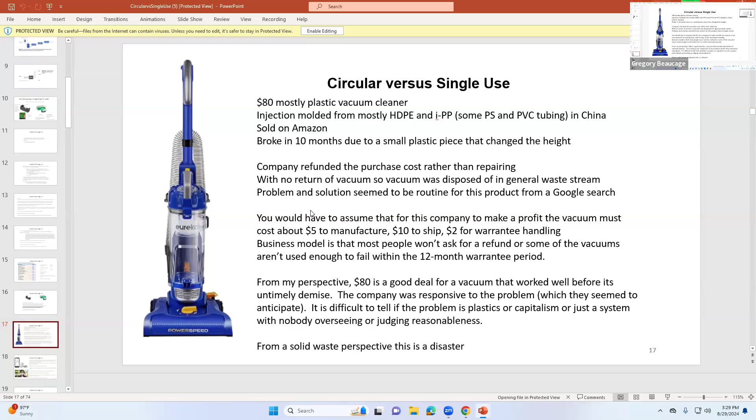So I wanted to do a tour at Rumpke Recycling on Wednesday, a week from yesterday, but only one person replied and that person said they couldn't go.

So is there some time that we could do tours? You're all chemical engineers in the same cycle more or less, right? Is there some time? Does anyone want to do tours? So when? To go down to Rumpke and look at the recycling thing.

It's outside the class. Other people that aren't in the class can go on it too. We kind of need at least 5 people to make it worthwhile. So, anyway, can you guys pick a time or can we vote on it or something?

What time? I know this is probably an unpopular opinion, but I feel like most of us have no classes on Fridays. The rest of us, like I have a lab on Wednesdays at that time, so our labs are throughout whatever, so it'd be really hard for me to take time out of my day Monday, Tuesday, Wednesday, or Thursday, because some professors aren't understanding if I have to miss class, whereas if it was on Friday, I'd just have to work around my one thing.

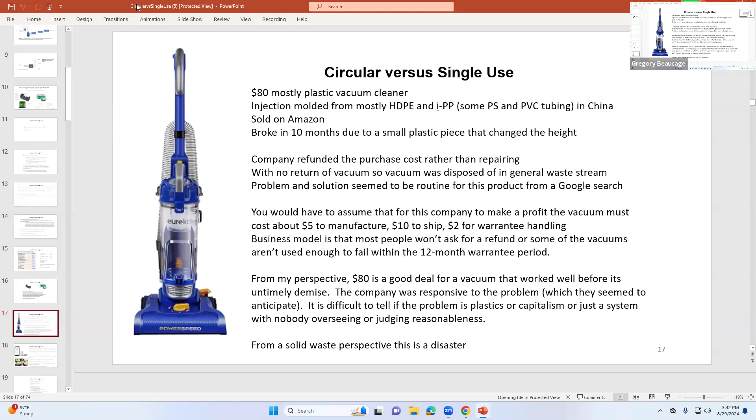I was going to go through a couple of things, but like, so you have this—this is an insulin pump, it's almost completely made of plastic. It's only got a little teeny piece of metal in there, I've taken these apart. That's it, the rest of it's all plastic. And it's disposable, a 3-day use, toss it.

So basically, this is a linear thing. It's an example of something that's a huge life improvement—it's got no cables to it, nothing. It just does that thing, and then you toss it after 3 days. That's a way improvement over any technology that was there before for the people that use it. But if you look at it, it comes in a blister pack with all this packaging that you have to throw away. And there's a whole movement in the medical field that culminated in COVID when these masks—we ran out of masks, right?

So there was a while where you couldn't get the N95 masks. People were clamoring for them and stockpiling them. I went to a doctor and they had a stack of them on the counter. I grabbed like 20 of them, because I figured these are going to run out really fast.

As it turned out, the mask became like a symbol of the left wing to right wing people. But anyway, among medical professionals, they were doing shifts and didn't have any masks. They ran out, so they were just getting exposed, right? So they're upset about it.

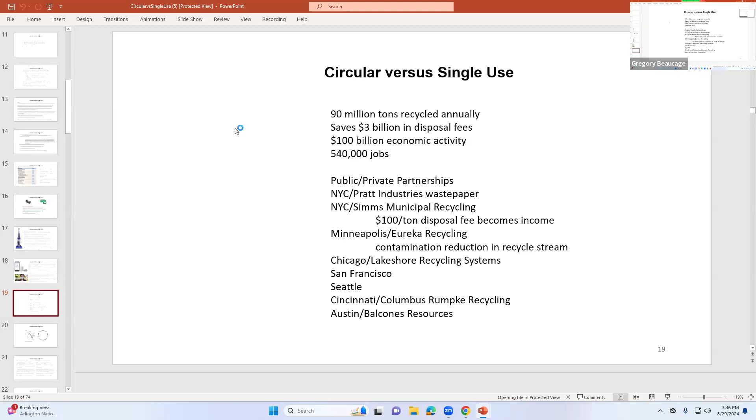Anyway, so basically the circular idea originated with this flow of things, and it's gone into industry where it's like a main theme among the plastics people. And then basically these are kind of the ideas: longevity and reuse of things, harmony with nature.

And then what does it ignore? Well, this whole thing is like, oh, we can just keep going where we're going if we can just figure out how to reuse plastic bottles and fill with shampoo at the store instead of buying the bottle of shampoo, which is something that's minor. Like people think, oh, that's going to be terrible.

Like when I was in college, at your age, we had a co-op and I did that. That's how I got all my stuff. It was cheaper, you know, so you just had a bottle and filled it. They were talking about the same kind of idea back then, so it wasn't a big deal to do that. People think, I guess, have been convinced that they need to get something and throw it away. And it's not really true. It's pretty easy to make that shift.

But the problem is there's too many people in the world, and it's not in the US because our population without immigration is going down. We aren't producing enough, so we need immigration to keep the economy right. Like if you want to have Social Security when you retire, you're going to have immigrants. Otherwise you won't have it, right?

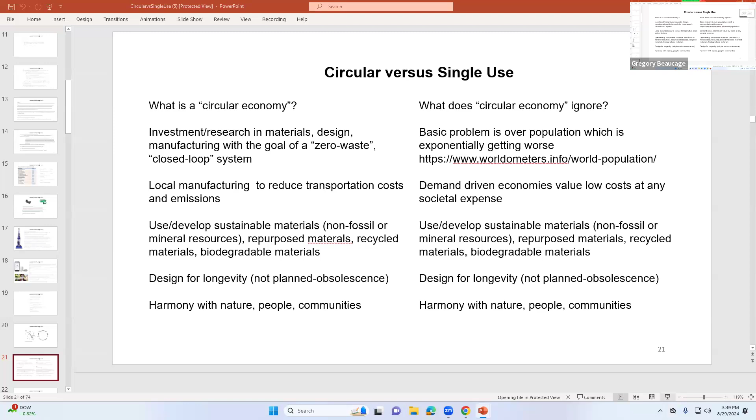I mentioned the oil wells in Colorado. So yeah, there is a corporate motivation, and you see it. Have any of you seen this circular thing at your co-op jobs, or people researching it? Like Lyondell, this is the only thing they talk about. When you go there, if we go on a tour of Lyondell, everyone there is talking about the circular economy. It's a polyethylene producer.

The same thing at Sun Chemical that makes pigments here. So all along, and P&G is in the same boat, I think. You co-op with P&G, right? Do they ever talk about circular?

I'm more in R&D, so I feel like that's not really where I've been, but I know they have been doing a lot more, focusing on bringing in materials that could be used, like making feedstocks, used from waste. I know they're putting a lot of emphasis on what they're saying, but I don't know.

Yeah, it's kind of weird because I asked a guy there that I know, he's in research doing simulations and stuff. I asked him - it's like those phone calls that say scam likely - and he said yeah, I can find someone. I asked him again, and then a month later he came back and said, oh yeah, I'm still looking for someone. He hasn't come back yet. So I'm wondering if there is anybody at P&G that's doing this, but it seems like at least on their webpage they talk about it. So it's hard to tell.

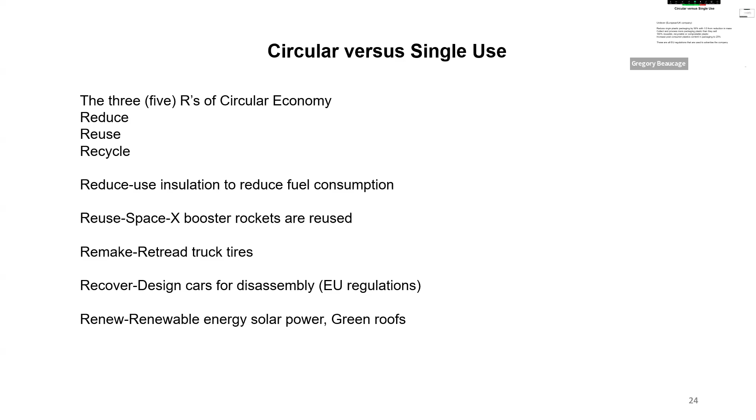Unilever's one of the EU, so it's a UK company. It was EU when they came up with this kind of formulation. But they've committed to collect more plastic packaging than they sell, to collect it, reprocess it, and reuse it. So it was pretty good. They list this on their webpage, but basically all this stuff is in the EU requirements. It's like they're advertising on the webpage the stuff that they legally have to do in Europe. Of course, a global company, but basically they aren't that nice.

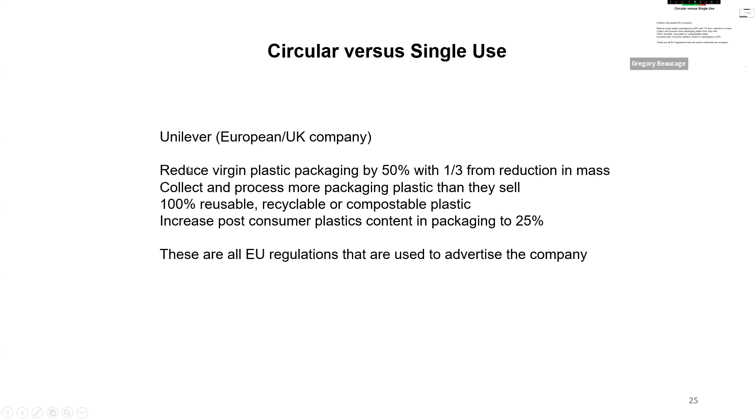Then reduce virgin plastic to half or a third of it, a third reduction in the mass. So they reduce the amount you use. It's like this reduce, reuse, remake theme of things. So they're trying to implement that almost instantly. Anyway, it's good that they're doing that. And I don't think P&G has made commitments like that yet, but these are pretty strict, good commitments they're making, though basically they're forced to by the EU.

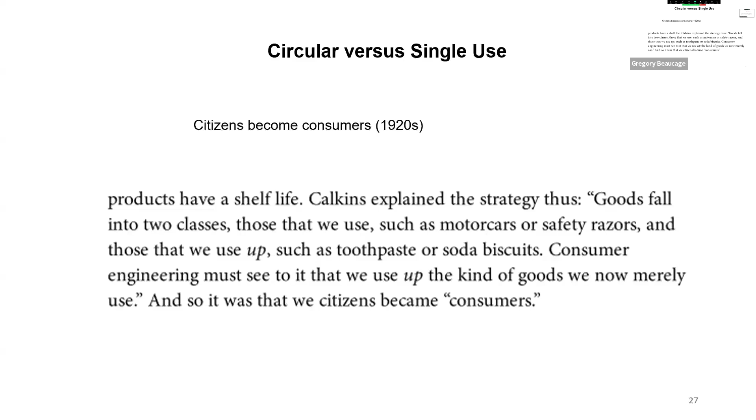There's a plastic bag menace. This is from the book, this thing from the 1920s, basically saying the same thing. This guy Calkins was giving business advice in the 1920s, saying there's two classes of things: things that are used, and things that are used up. The point of the business model in the 1920s was to change things that are used into things that are used up, to boost sales of stuff, so you throw away more things. So there was a whole business model that was the way things should go, even from the 20s all the way through. He goes through that in the book.

You can't get rid of plastics because, say, wires—we went to the wire and cable, so you can make a wire, but it's useless without the polyethylene or PVC coating on it. You can't make any electronic device without plastic. That means you can't get rid of this stuff, and you can't make a paper coating for wires, it isn't gonna work, it'll have problems. Anyway, so cars, everything has to have plastics in it.

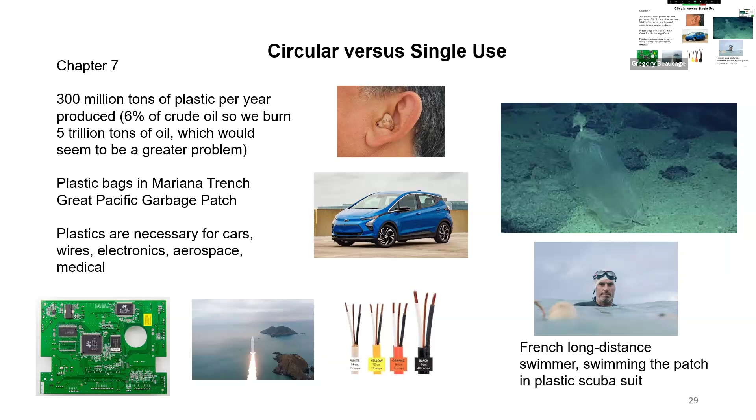I mean, this is pretty convenient to throw on - they have those to throw on your car too, if you're an Uber driver or something. Anyway, one thing that's in this model is this bottle bill thing.

I forget where I got this from, but basically there's about 10 states that have a bottle bill. Ohio isn't one of them. But you can drastically improve the recycling of plastic bottles by doing that - the 10 deposit states get 71% recovery, while non-deposit is 30% through street-side recovery type things.

These people figured this out - there's a bottlebill.org, so they have a vested interest in the bottle bill thing. They figured out the net cost for the deposit states is less than the states that don't have it, because we have to pay for the recovery of the bottles, picking them up at the street. So the net cost is higher to not have a bottle bill.

There's probably arguments both ways on this kind of thing. Anyway, it's interesting - they note on their webpage that Cincinnati did a study on this bottle bill thing, and they found out they could save a ton of money by going to having a bottle bill in Cincinnati.

I've lived in states with bottle bills - it's kind of not that big of a deal. You get used to carrying the things back to the grocery store. It kind of becomes a routine, so you don't throw them out, even for a nickel a bottle.

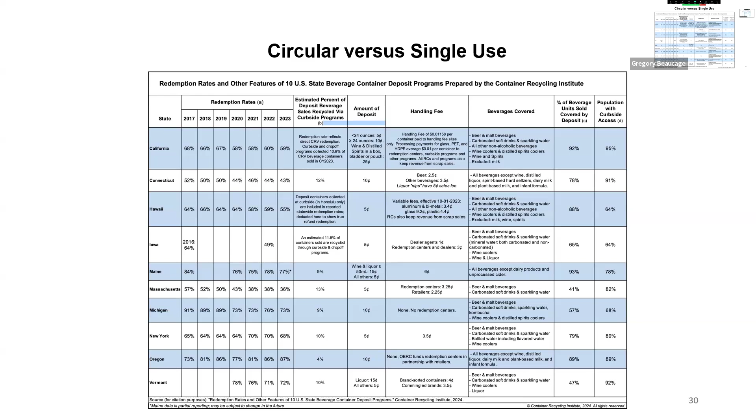But you'll see that Rumpke can handle it because PET has an IR signature. So they can have a conveyor belt with PET and a robot that figures out where the PET bottle is, sends an air blast, pops the bottle off, and it flips over a little barrier. So there's already technology that can separate PET bottles from the mixed stream, like with a robot, continuously doing that.

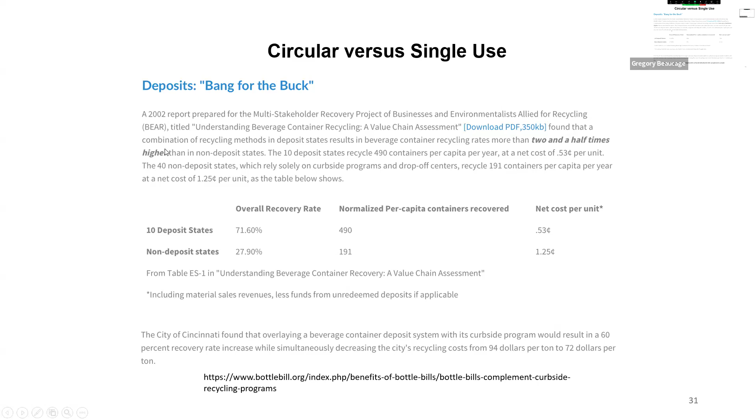But even with that technology, only 27% is being recovered, versus 71% where you put a nickel on it. So you can imagine a nickel isn't much money, yet it's pretty strange that it can drive such a big difference. It's pretty debatable—there are different options, and different parts of the country do different things, but there's definitely a problem.

So, anyway, I rewrote this but it hasn't somehow updated on the webpage. So chapter 10—what's chapter 10 about? Oh, chapter 10 is the final chapter in the book, and he talks about how it's going to be in the future. It's kind of interesting to read, but I had some notes on that here.

He's saying basically that you refill your shampoo bottle, your clothes are made out of algae or other polymers from algae, and you drive an electric car with solar panels to charge it. He's talking about how things are going to be in 10 years. Chapter 10 is like the summary of circular versus single use, where the future is going.

Cincinnati is always 50 years behind. As Mark Twain said, when the world ends, he wants to be in Cincinnati, because it'll be 50 years behind. But anyway, who knows—we will see what happens.

So anyway, I wanted to go to this other part, the plastics thing. So where's that thing?

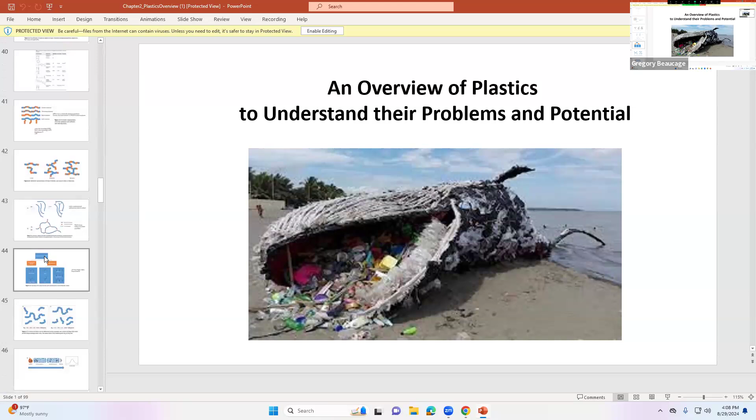I got stuff from different places here, but maybe I'll skip down to this. This is from the book, stuff from the book Plastics in a Circular Economy. He's got a chapter. The book is, if it go here...

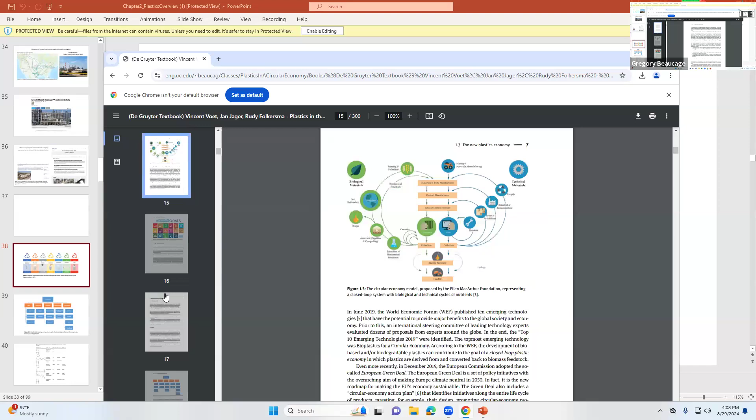Chapter 1 is his version of the fluff book. And chapter 2 is a pretty good summary of plastics. Anyway, if you could use that, it's got a lot more than what I want to go through. So you could kind of go through this if you want.

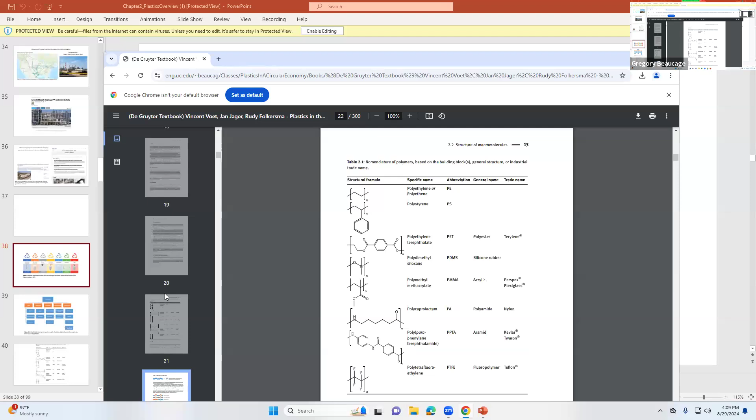See, this is chapter 2. Chapter 2 basically goes through intro to polymers more or less, but lower key, and it goes through some things you don't really need to know. So I try to take some things that might be useful from that.

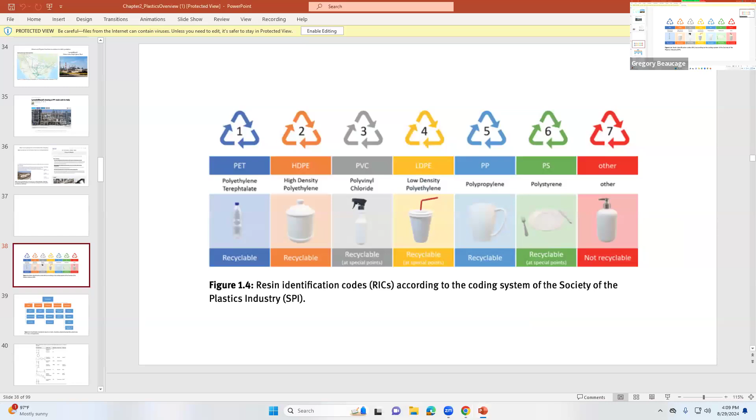So it's got this chart of all the major plastic components, and those are the numbers for recycling. Number 6 is polystyrene, not recyclable. High density and low density are recyclable. Polypropylene is marginally recyclable. And PET is number 1, because it's the most recycled plastic - the water bottles - because you can depolymerize it or repelletize it if you want. So that's basically the list of the major things being recycled.

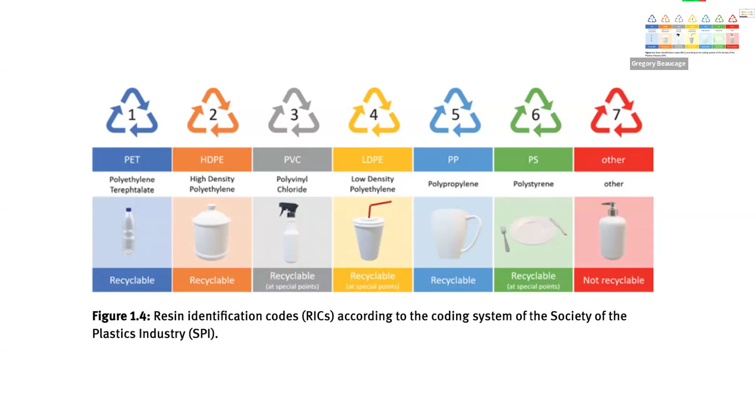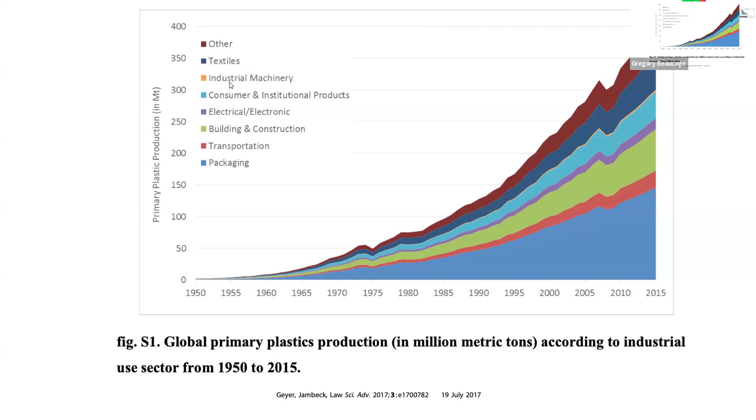This is a pretty good place. It's just showing the plastics production in metric tons, what this is showing is the markets - where is the stuff going to, where is it being used. So packaging is a big thing, and not only is it a big cut of it - packaging is going to be like half of the plastics - but its lifetime is less than a year. The packaging is going to be like a 2-month lifetime. So even though it's a lot of plastic being produced, it's being cycled through, ends up going directly to the waste stream. So packaging is one of the main problems.

And the other sectors are like cars, transportation, construction, but construction isn't that bad because it's a 50-year, 100-year lifetime. So if you make that much plastic, it's almost permanently entombed in the place you're living in - it's out of the system. Whereas packaging is just cycling through and you're dumping it out. Then electronics have an in-between life cycle between housing and packaging, and transportation has a longer term than electronics, but similar - so you have to think about the lifetimes.

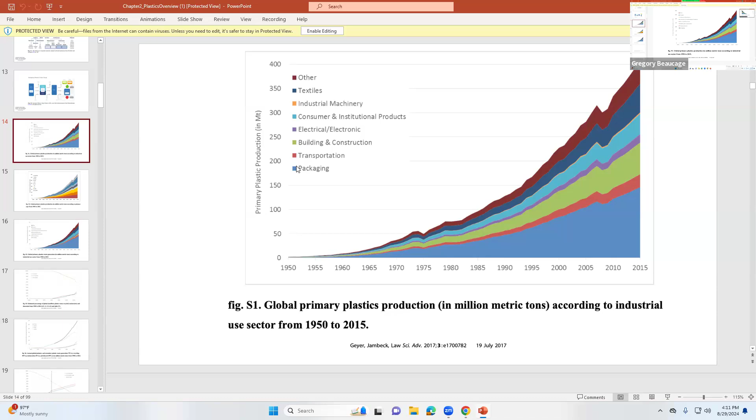So it's a complicated thing, this is according to the categories of plastics. Low density polyethylene - I don't know what LD is though, LDPE - but LD, I don't know. High density polyethylene, polystyrene, and then PVCs. So these are the polyolefins: PVC, PP, HDPE, and LDPE. Oh, maybe that's linear low, like LLDPE or something.

So anyway, if you look at that, it ends up being 80%. PVC's here, so you'd add that into the other guys. And this is a total world production, I guess, for this thing.

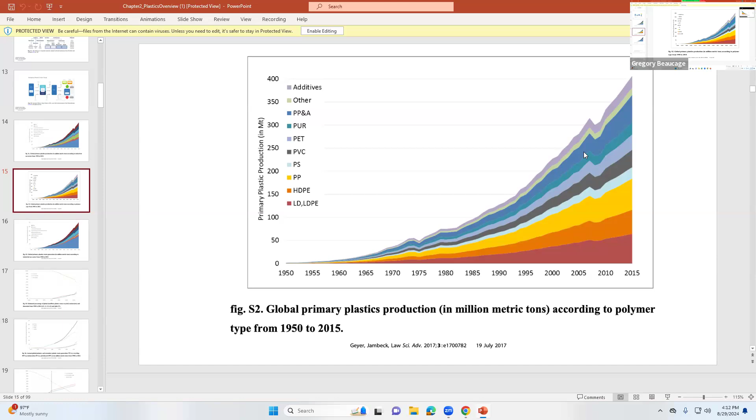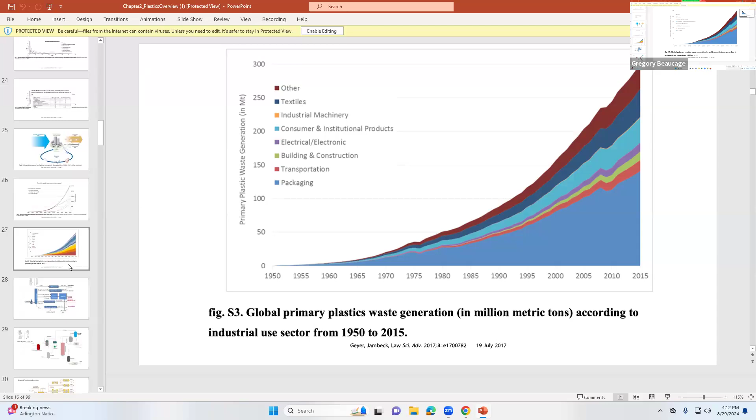So it's exponentially increasing, kind of a curvy shaped thing, meaning it's exponentially going up. And then this is where the wastage generates - you see the amount used for packaging is smaller than the waste generated because the life cycle is much faster for the thing. Someplace in here I have all the life cycles of these things, I guess maybe I already showed that too. This one is the same thing, right, cutting into the types.

So anyway, the polyolefins are going to come from the petrochemical industry. Basically you have oil, you distill it, and it goes into these cuts - the lighter things at the top, and the bunker fuel at the bottom. The high sulfur stuff they put into ships and burn when they're offshore.

The kerosene stream kind of goes to a cracker, and ends up being the polyolefins. So if you're making gasoline, you're going to get a lot of this stuff, and if you don't need that much kerosene, you have to dispose of it somehow. Making polyethylene and polypropylene is a good way to do it. There's also other ways - you can get the precursors to polyethylene and polypropylene from natural gas too.

I think this is LPG. So you have olefin feed, and there's a cracker that takes a chain with linear bonds and makes it into double bonds. So you make a higher energy bond by cooking it - you remove a hydrogen and pop a bond onto it.

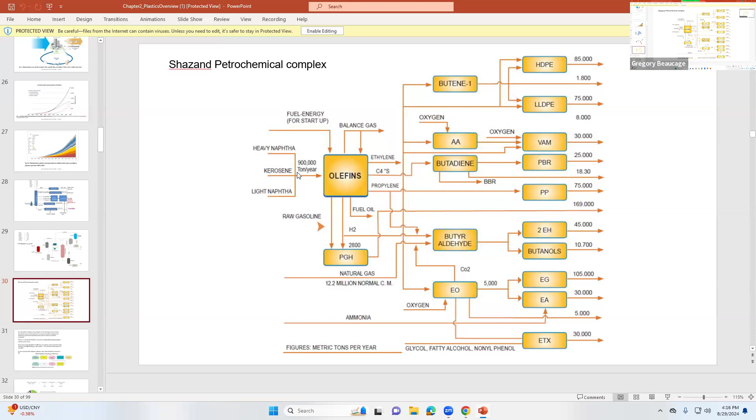So all these are byproducts of the refining process and the cracking process. If you're making all this gasoline, all these other things come along, and you have to get rid of the rest of the oil somehow. You get rid of it by making olefins and polyolefins from it. So the system is pretty complicated.

It goes from oil wells and oil companies, and there's refinery companies that could be tied to it or might be separate. There's pipeline companies with all these lines of different pipelines. Somewhere here I have a picture - these are the pipelines in the US, the major ones, and there's minor ones also.

You can see mostly it's gone from Texas to Chicago - this big pipeline going Texas to Chicago, and Chicago's got big production, big polyolefins going on. Some of the pipelines also go up to New Jersey, so there's stuff going on there too. A lot of the petrochemical industry is in Texas, and then in New Jersey and Illinois.

It's kind of a weird system, but this huge infrastructure gives us huge advantages over other countries. If you go to the developing world, there's nothing like this - they dream of having this kind of system. That's just the pipelines for hydrocarbon gases for the petrochemical industry, just part of the plot of all the pipes going everywhere. You can think of the pipeline going through Minnesota with crude oil in it, or you can think, geez, we have this huge infrastructure that's so powerful, better than anything in the world. That's why we have the best petrochemical industry in the world.

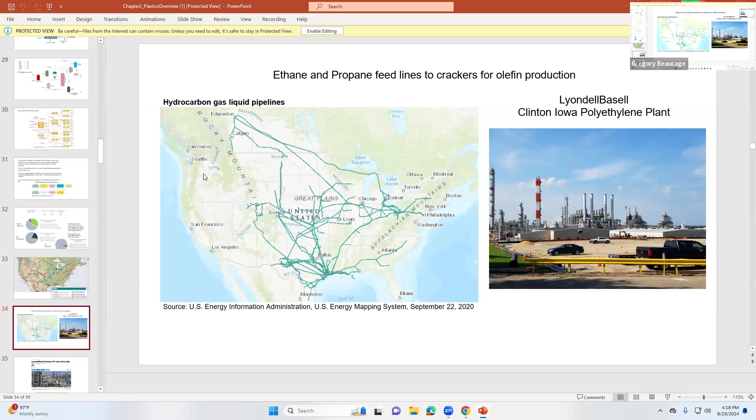And so basically there's good and bad to it. But...

Anyway, so all these petrochemical companies, Lyondell, I asked them how's the business? And they said, we're selling a polypropylene resin unit in Italy. So it's Basell, and it's all like mergers, right? Basically it's a commodity item. So the prices go up and they decide they're going to build a lot of plants, then it's cyclic and then it drops.

Then they're stuck with all this excess production capacity, so they fire everybody - basically people are expendable. Then the thing picks up again. So there's a cycle of about 7 years where they go through this boom and bust. Everyone's really happy right now, the bust part's coming very soon. It's because they build all these plants when things are looking good, and they have no foresight even 5 years down the road, even though they have 80 years of history doing this. They still don't look ahead and say we aren't going to need this capacity in a couple years, or think about all the people they're hiring.

So anyway, they lopped off this polypropylene resin plant. Basell was BASF and Shell, right? And Lyondell was strictly a Texas oil company, like the nastiest kind, worse than Phillips - definitely down to earth nasty, and not interested in research or anything like that, just pump the oil, put it into pipes, that's it.

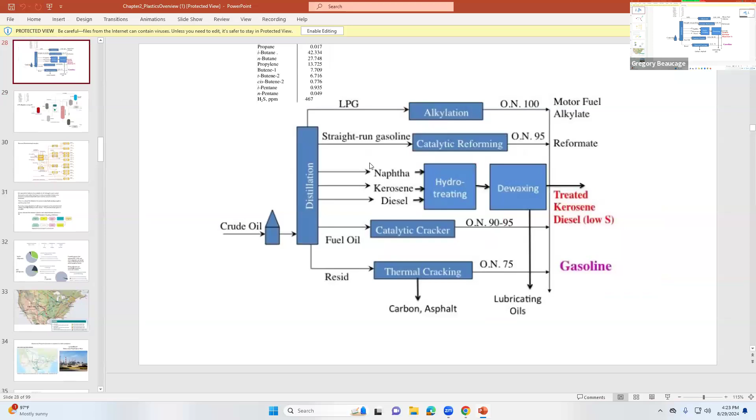So that's kind of the situation for this thing. It's a commodity industry, and again most of it is polyolefins - that's going to be 80% of it, and then 20% is going to be PET.

So this is a smaller chunk of it. There isn't really a big component after the polyolefins. If you're talking about solving the polyolefin problem, that's the main part, then you just have 20% left. And PET is a big chunk of that.

And some of the things like polyurethane, you're probably not going to recycle. Some of them are just going to end up with no solution. It's cross-linked, usually cross-linked rubber.

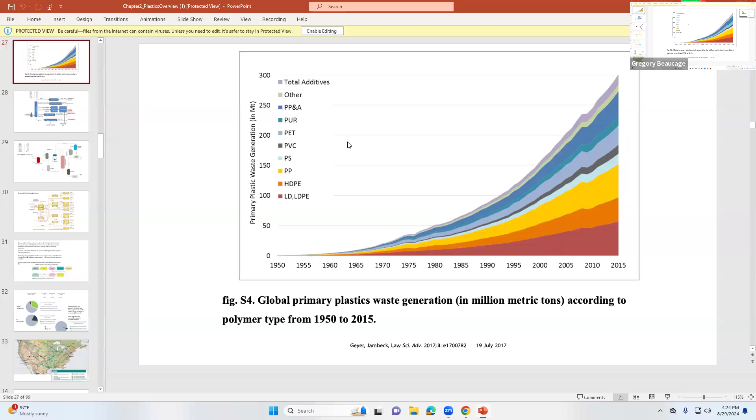So the best thing to do with it is probably to burn it, and a better scenario would be to pyrolyze it and make oil with it—heat it up below oxygen and you can make a sludgy oil kind of thing. You could feed it in, either distill it, feed it back into the same cycle, or just burn it as is for fuel—heating fuel, or for ships, things like that.

Anyway, so there's that business. This is kind of from the book—he's good, like it's pretty good what he does. He breaks down the polymer thing into different ways you could talk about plastics, right? So you could say bioplastics, and then...

Semi-synthetic is that you can get ethylene—when you have a banana and you put it in a bag, it makes ethylene gas, that's what makes it ripen. So ethylene's around, you could use bananas to make polyethylene theoretically. People are seriously looking at that, figuring out different ways to make ethylene naturally. That would be a kind of semi-synthetic plastic.

If you do make ethylene from bananas and then pipe it, it would go into the same pipe—the pipe from Texas—and they'd use it in Chicago, and they'd just say it's 25% banana polyethylene. So it won't be pure, it'll still have a petrochemical component feeding into the same nasty big factory. Clinton, Iowa or somewhere is where they make it, right outside Chicago kind of.

Anyway, there's synthetic, which is basically all petrochemical. So that's one way to look at it. Then chemistry-wise, he says organic, inorganic. Some of what he says is kind of weird because the inorganic polymers are basically PDMS, like siloxane polymers, and organic is everything else. Siloxane polymers are probably like 1% of plastics—silicone rubber, bathtub sealant.